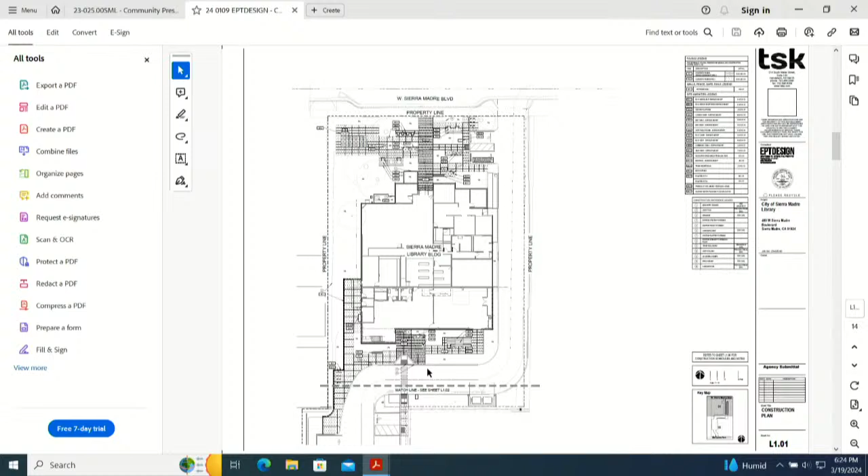I'm going to go to the next one here. What you can see is the way we are now providing parking is leading down that hill. We're providing the parking required for the site, and we've actually moved the driveway for the library so it's not tucked up against the residents here, because what we're hearing is that's actually a bit of a hazard - when people try to pull out, they can't always see other people coming down the road. By moving it, we're giving more of a sight line so people don't have to worry about crashes.

As they pull out of that or pull into this, you can also pull in off Mariposa Avenue here into this parking lot as well. Any questions on the site before I go back to the rest of the presentation?

I was curious about the floor plan on the lower level - there's a long hallway-looking thing at the north end. I thought that was for the archive? That is - it's an existing part of the library right now.

From a cost standpoint, what we decided is to leave it as is. We're providing an accessible ramp up to it, since it's roughly 18 inches to 2 feet taller than the rest of the floor down there, and it's acting basically as archive storage.

That's why there's no door directly from the east part of the archive to the north part of it. It also shows a door on the north side, which provides access to the crawl space under the building. You don't want to go there.

In the Friends of the Library space that can be open when the library is closed, will they have access to those bathrooms on the first floor, or is there no bathroom? There's no bathroom specifically for that use, so they'll have to walk around. I was thinking when the library was closed, if there was a way for them to access that front room.

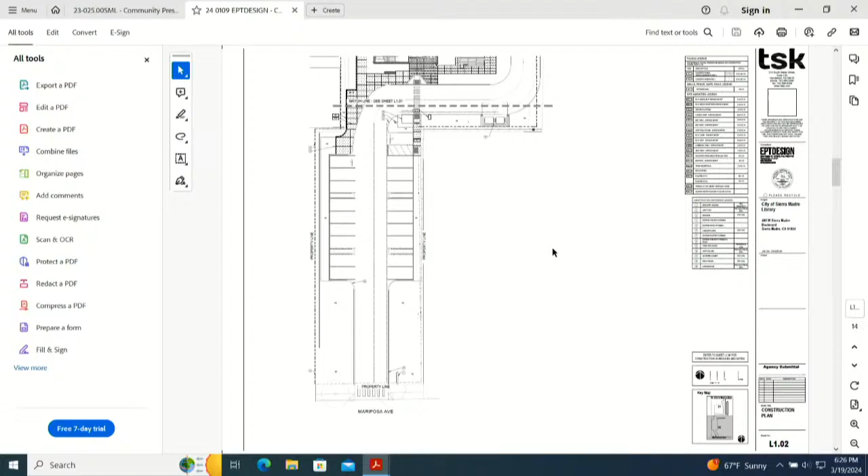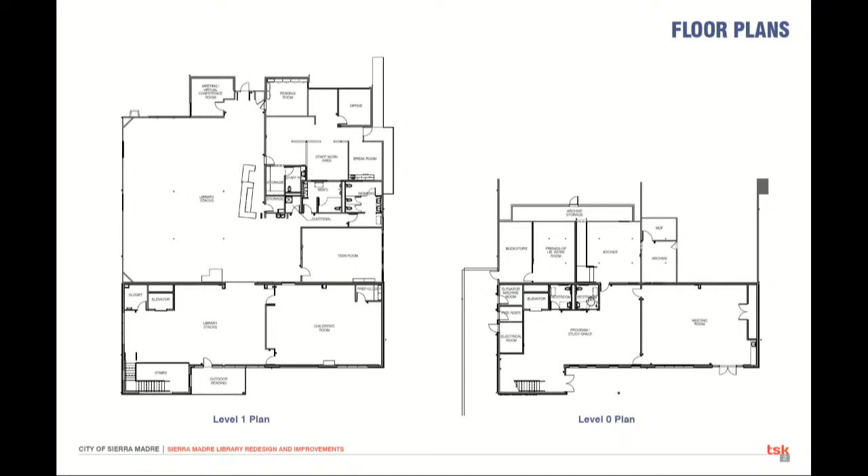I want to bring us back to the fact that we have these two restrooms down here on the lower level, so you don't have to go up to the higher level. But they still have to exit outside, go down, and come back in—there's no way back through. That's something we looked at, but from the standpoint of scheduling, access, and the floor plan, we decided to keep them completely physically separate.

This isn't very glamorous, but if you know how to read plans, this is the reflected ceiling plan—imagine lying on your back and looking straight up, this is what you'd see. We're showing this because there's a lot of concern about acoustics in the library, and anytime you have a big open space, sound travels. So one thing we're doing to help mitigate that is using high NRC, or noise reduction coefficient, panels—basically how much noise the acoustical panels stop—and putting as many of those throughout the site as we can.

You'll also see this little plinth right above the main circulation desk to help with noise as much as possible. Another thing you'll notice in the interior renderings is that, as you may know from that lower space, the ceilings aren't very high. I'm 6'4" and they're coming right down on me—the reality is this building's floor to floor is only 9 feet 4 inches, which is a very small amount of space.

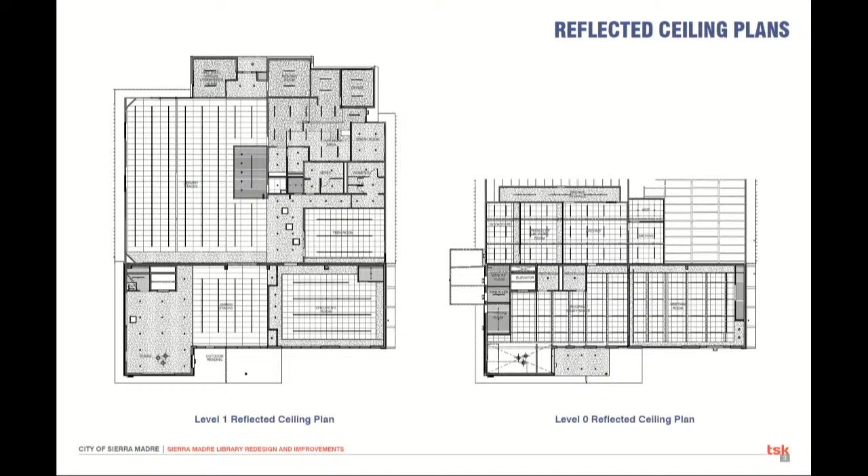We really want to make the library as beautiful as possible, so we've tried to keep our mechanical systems from just floating out in the open and instead tuck them away. The soffits you see throughout the rooms are opportunities for us to run mechanical equipment through the space without lowering the ceiling further, while still providing all the air supply and return needed for each room.

So as we get into the imagery, one of the things you're going to notice is we're not really changing much on the north side of the building. We're really trying to respect the design of the library as it is.

There was talk early on about whether to completely replace the building, start over, leave it as is, or expand it. For the benefit of future generations, the decision was to expand the library. From a cost perspective, the best way to do that is to maintain the existing structure while adding onto it, instead of having two completely different types of buildings that don't look like they belong together, like the south facade and the rest of the library does right now. We really want the building to feel holistic and unified.

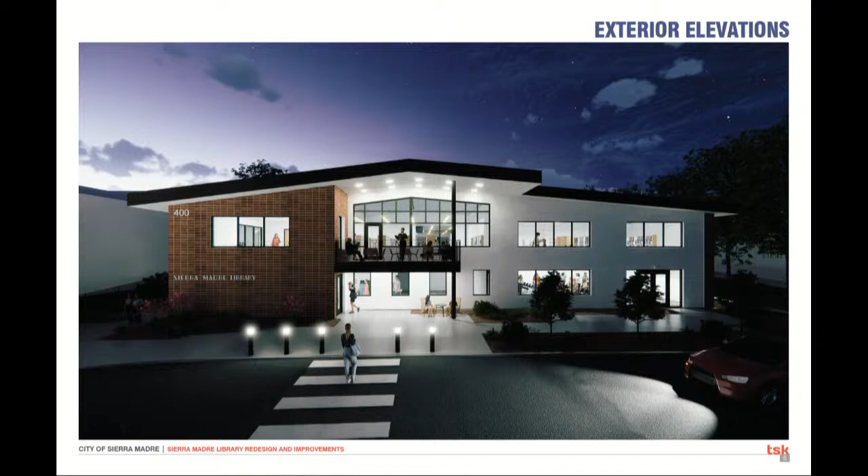So while this is the north side, here is an image of the south side. You can see we're trying to maintain some of the characteristics of mid-century modern design, as well as some of the characteristics of the library we have here. We're using brick - it's not a full brick, it's actually a thin brick veneer, which makes a lot more sense for California and the way we do construction these days. We're using white stucco plaster, just like we normally would, and large glazing that follows the same language we see on the north side of the facade, as well as the east and west. And then using some of that same color - you'll notice a lot of the windows and fascia boards are colored a dark metal.

Uh-oh, I lost the color. All right, here it is. So, yeah,

From a material standpoint, we're looking at finding a brick that matches the brick on the north side of the building. We're also looking at aluminum metal windows, which from an energy standpoint are much better, and we can actually get them in coloration similar to the rest of the building. And then having that same dark fascia color so that it all works together as a single palette around the building. These brownish grays you notice here are actually pretty true to the mid-century modern design, and you'll see that's a common characteristic we're employing throughout the library.

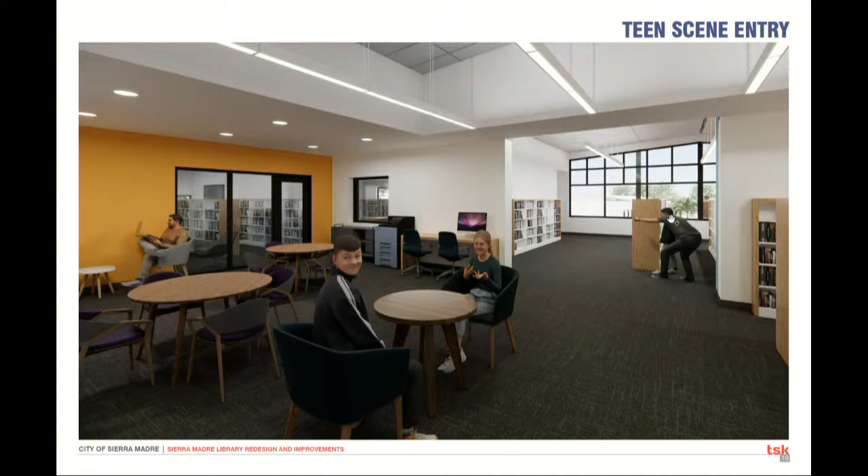Using that color really to try to begin to brighten up the space. Then again, you see through this opening into the new addition of the library, as if you had just come up the stairs off that new south entry. You've walked up the stairs—you could have taken the elevator, but you decided to get a little exercise today—and it shows you the large area of that new addition. You can also begin to see a little bit of a soft blue color, which is one of the things we're using on some of our expansive walls, again just to bring some color into the library so it's not just a white box. We don't want to go overboard with color, but we also don't want to underdo it where everything becomes too white.

So off to the right side of that picture, are we looking at the front door? Down here, where the woman is standing—no, that's the children's room, level one, to the right, behind the lady walking. Right here, that's our door. No, up and to the right—yeah, this is to the reading balcony. Okay, and that's the children's room down there. You can see the other pocket up there is the children's room as well.

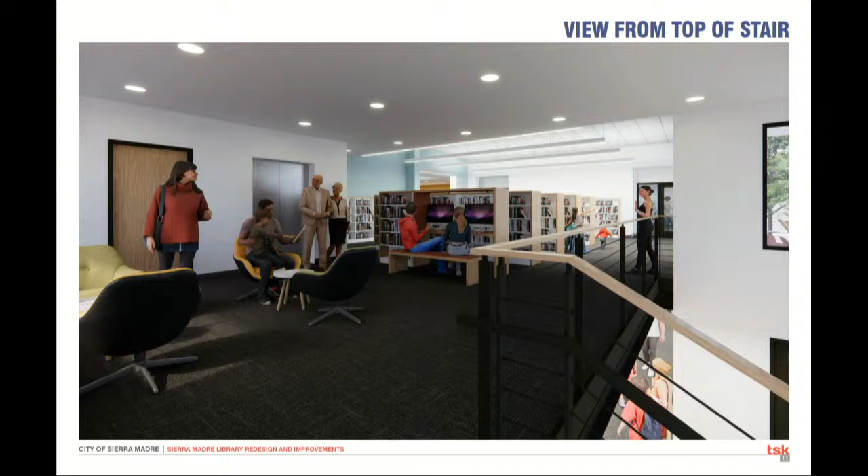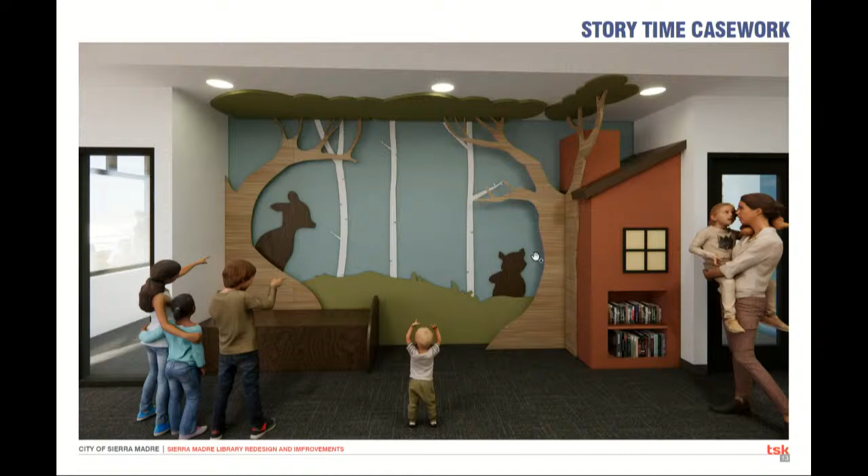Looking at our story time corner here, there was a suggestion by the city when we had the plans up in the library. Some people made suggestions, and one of them was, what if the story time corner, which at that point was just a wall, was woodland themed? We liked that idea, and so we moved forward with this kind of woodland theme.

You can see this is the log that you get to sit on in the enchanted forest. You have your deer, and I think it's a raccoon—personally I was thinking raccoon, but yes, it's a raccoon. We have our forest home right here with some books, and some trees in the background so that we actually have some depth in it as well, really just to make a space that's special for the kids at a time when their imaginations really can soar.

One of the things you'll notice here also is just a continuation of using those acoustical panels to try to help with the sound as much as we can. And one of the things I haven't pointed out—we're replacing the lighting with more modern fixtures. Instead of the big boxy fixtures, much of them broken right now, we're providing a smaller linear pendant light, which both shines up and down. It's often used in classrooms because it's a very effective way to provide a proper lighting level at our typical working space, reflecting off the ceiling as well as coming straight down.

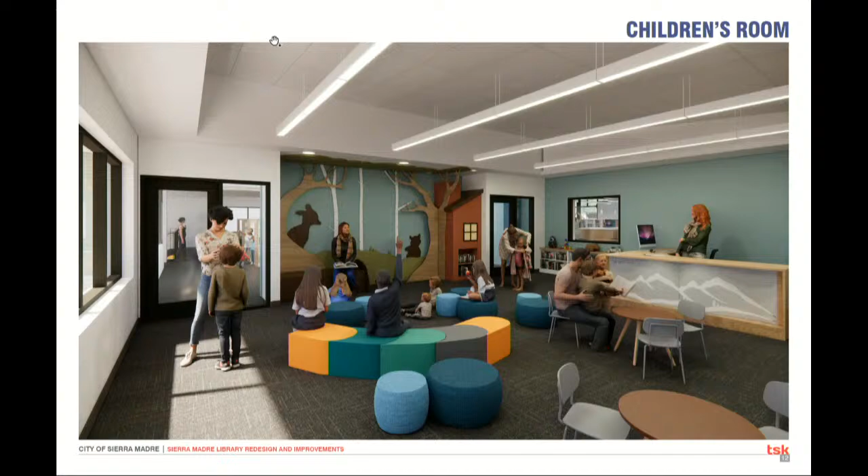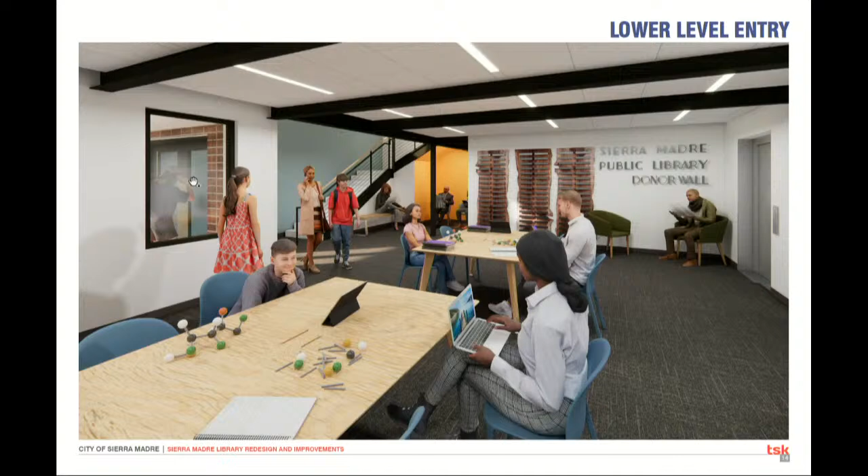So this is in the lower level. If you can see where the mouse is, where this gentleman is—that's that new door on the south side. So you're coming in, and there's a stairway going up to the second level. Again, we put some of that yellow color right underneath the stair here. That's an area that we could have just closed off, but it really would have been a waste of space, so we opened it up and put some of that yellow color in there to brighten it up. I believe the library is looking at potentially having another check-in desk at that location to better serve the public.

What you can see in this program space—whoops, sorry, very sensitive mouse—is the opportunity to rearrange it in different ways for different uses based on whatever program the library has going on.

Up here you see what I was talking about earlier, where we have those exposed beams because of our ceiling height, really trying to make the space as open as possible, pushing that ceiling up into the structure so it doesn't feel like it's coming down right on top of your head. And then you see in the back wall here, a donor wall, so an opportunity for the city to really take part in the creation of the library, in things going on to the future, and be recognized for that as well. Right here also then is our elevator up to the next floor.

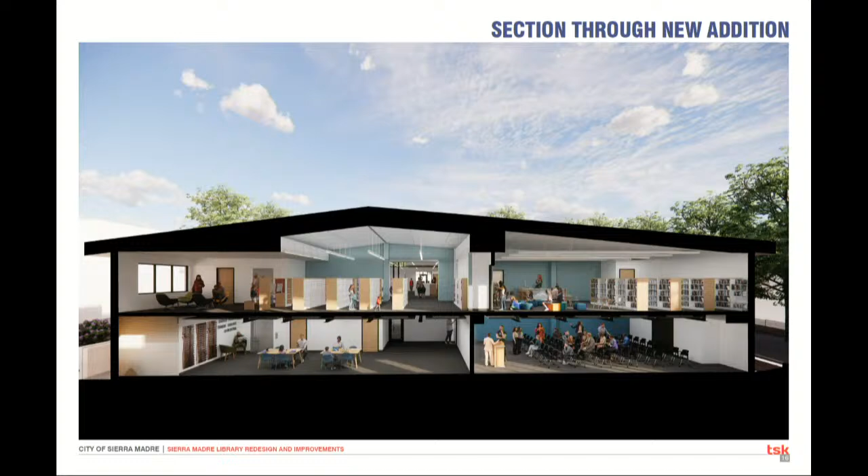I wish I could zoom in, but this kind of gives a section cut through that entire addition, just to give you an idea of all those spaces. Here's that community meeting room with, there's actually a little kitchenette for any events going on down there, not shown here. We have our kids room right here with our storytime corner right on the west wall, kind of our main addition to the library, really trying to follow the character of the existing library with the sloped ceilings in there, a lower roof where we need it, or a lower ceiling where we need it for mechanical systems. And then our lower area here, this program space, these two doors lead to the single occupancy restrooms, and this door right here leads back into the archive space itself.

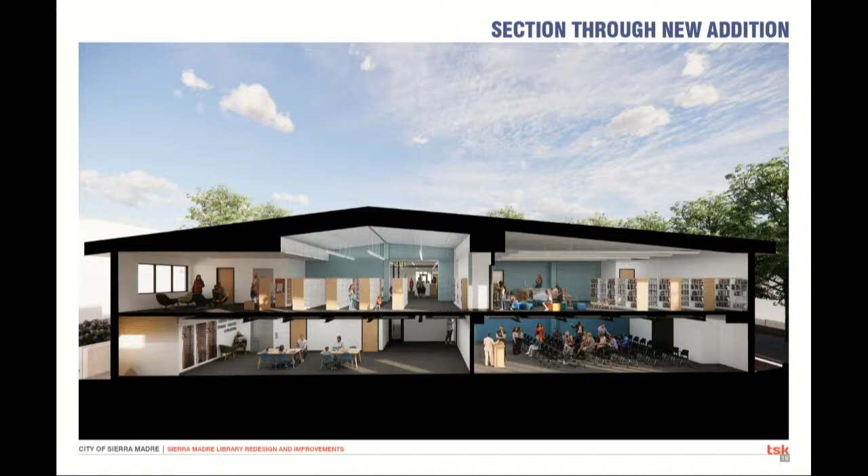And that's the images I have to show you. If anyone has any questions or would like to see any finishes, please try to come up to the microphone for the people at home that are watching.

If you're curious about some of these finishes and want to wait till afterwards, you can come look at them. A lot of the woods that are in there, some of the colors you can see a little bit more clearly, the flooring, so on and so forth.

How many people could you get into the meeting room? It's going to be a little bit dependent on the size of the chairs that are selected, but around 100. And that's theater style. Correct.

So we are currently in plan check, which means that our drawings are being reviewed, and actually for the most part have been reviewed. So we're picking up the few comments that had been given to us, and we're hoping, we're actually working on the schedule right now, so I can't give you a definitive schedule, but I'm thinking probably sometime towards the end of the summer we might be going into construction.

There are some issues that were discovered in the plans, nothing major. Safety is a priority. We want to make sure, the city wants to make sure that fire suppression, anything to do with fire sprinklers, is top notch. And TSK is very open to that, making sure that the city complies. There are state regulations that we need to comply with. And again, it's a library for the next generation. We want to have this conversation 50, 60 years from now.

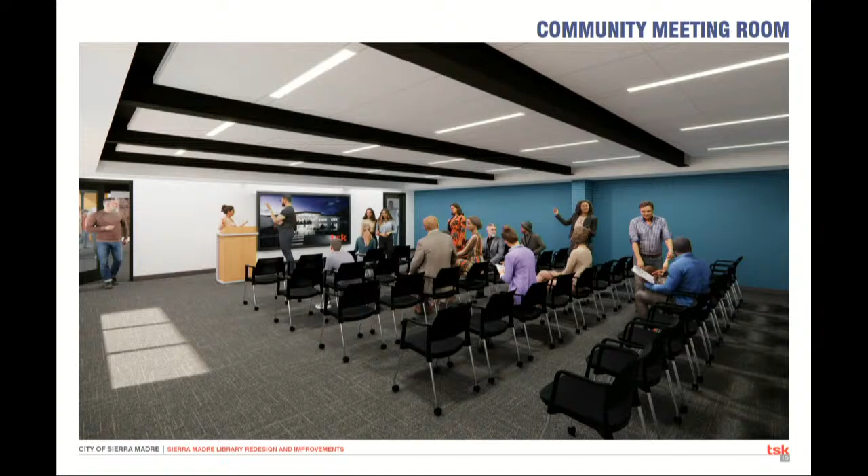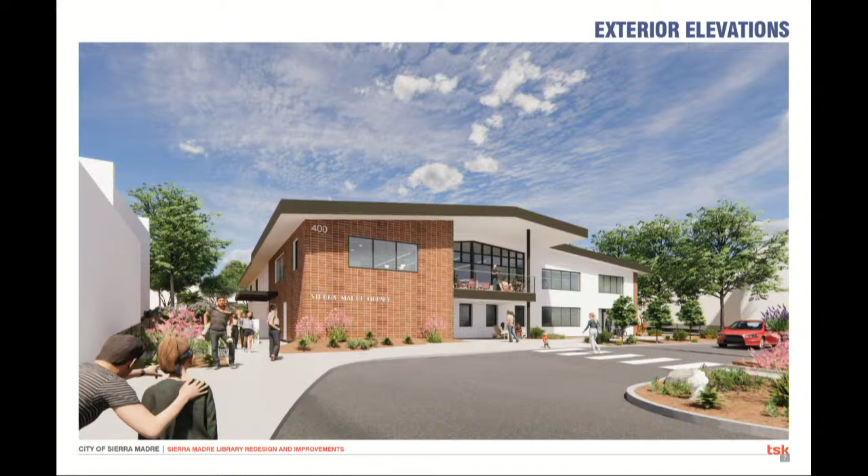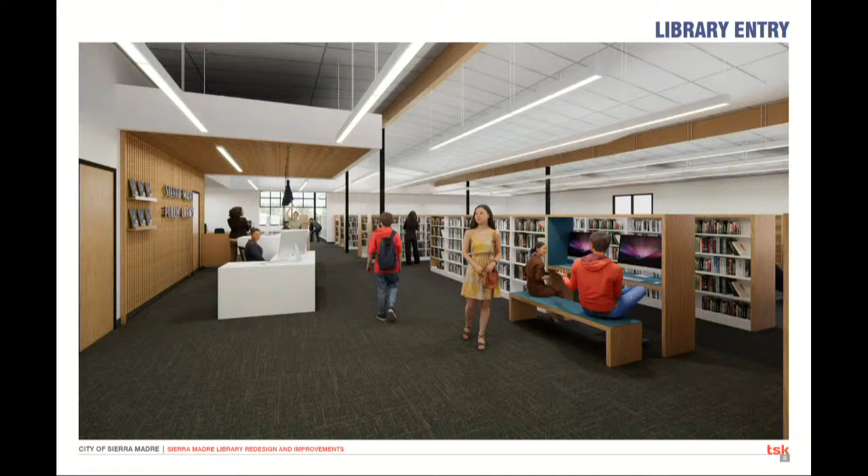Is there a computer-specific area in the library? I'll give that over to Layla. The question was if there's a computer-specific area. Currently we have a computer room with desktops. What we're hoping to do is more laptops anytime, where you can check out a laptop and sit anywhere in the library, especially since we have a reading balcony, and also check out a charger. But we also plan on having one or two carrels dedicated to desktops, but not as many computers as we had before.

So we're trying to move more towards laptops and being able to be a little bit mobile. We're also looking into wireless printing and being able to print from the laptops. That's a whole fun thing, though.

Layla, would you let the people listening at home especially know that this is the structure that they're going to have to donate money for, the furniture, fixtures and equipment? Yes, the comment was that this is the structure we'll be working with, and that we're using the Friends of the Library and the Library Foundation to fund all of our furniture, fixtures, and equipment. So we will need additional help with this building.

In addition to that, we noticed, as we had to order additional shelving for our temporary library, that they are on casters and mobile, and everything's gone up in price, and not only gone up in price but gone up in lead time. We ordered 6 of these mobile shelving units back in September, October timeframe, and we only just got them this month, or last month, I believe, the end of last month. We were told it was a 3-month lead time, so there's a lot to consider.